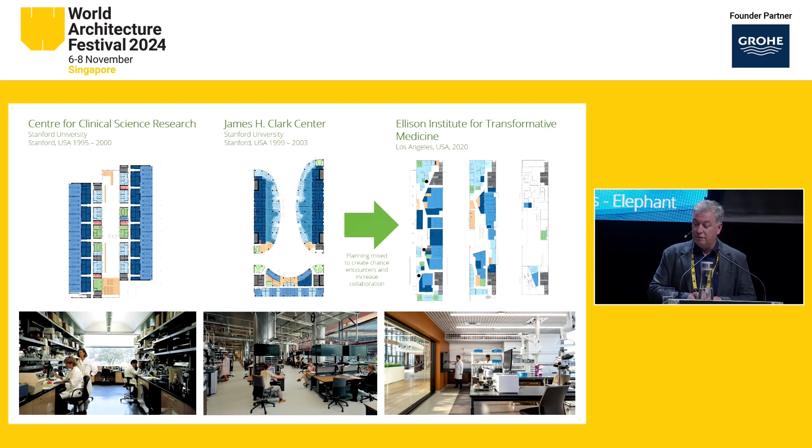When you open each one of those volumes, you can see that sequence. So it just gives you a sort of visual feel about how long the human genome is. Apparently the female genome is another 50 books, so make of that what you will—but quite an interesting stopping and inspirational point around the building.

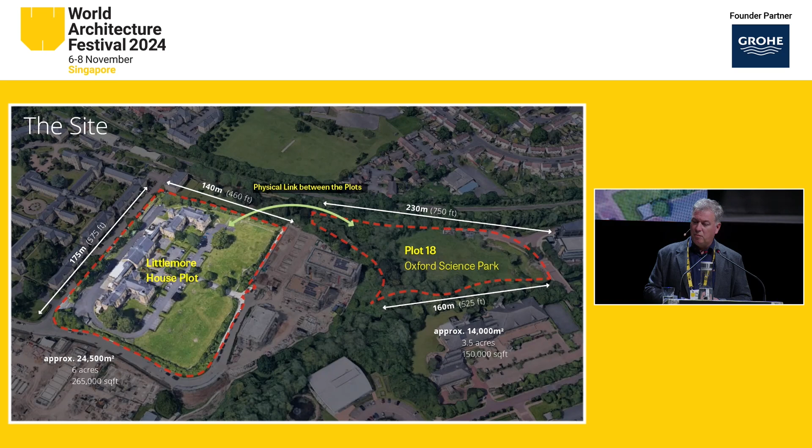So that site is very much more suburban, it's more hemmed in. Plot 18 on the science park is much more natural, and you can see the difference between the 2 sites—one surrounded on 3 sides by buildings. Those buildings are Peabody Trust affordable housing, so we have a number of setbacks we have to adhere to on that particular plot.

The Littlemore Brook plot was flattened when they created the science park, but it has a brook running down the left-hand side of the site, and that site actually floods—we had to take that into account when we designed the building. It's surrounded by nature as opposed to surrounded by buildings.

That led us to a very simple approach in creating the two buildings that make up the Institute. One was to effectively complete that inner courtyard with the Littlemore House buildings, and then the Littlemore Brook was really to make it look out into that green landscape around it.

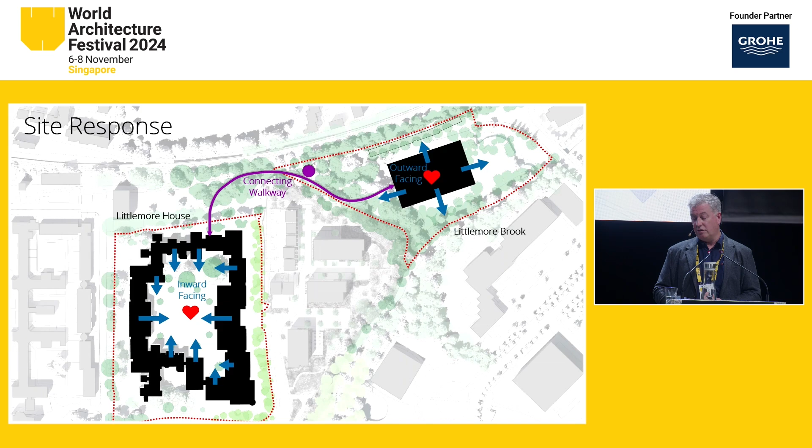One of the conundrums was connecting the two plots. They're not currently connected, so we came up with the idea of creating a walkway crossing a piece of land, which had a lot of constraints attached to it. On the Littlemore House site, there's a 6-metre drop across the site to the corner, and there's 100 car parking spaces which the client wanted to retain. So we pushed them into the corner and created a sort of flat deck.

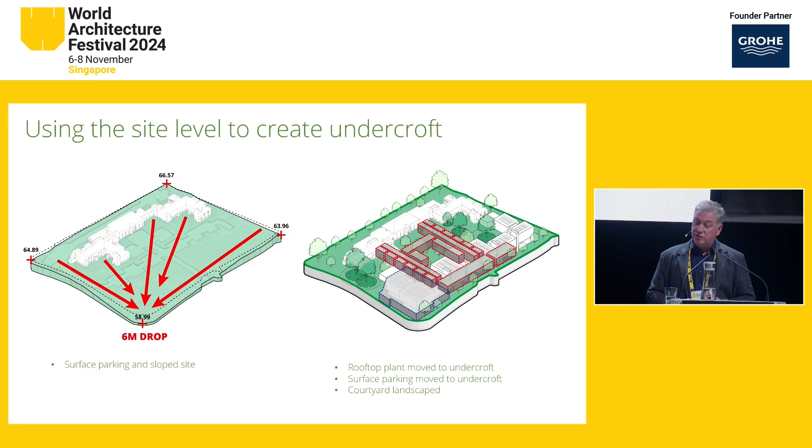The other thing we had to do was rooftop plant. Laboratory buildings can be quite cumbersome and heavy, and in creating that deck, we managed to put some of that plant underneath and liberate the roofs, which has allowed us to put a lot of PV collection.

We're using ground source heat pumps as well, with a lot of boreholes around the site. That's generating 550 megawatt hours of energy and provides roughly a third of the total site energy demand for us. Underneath those panels, we have a rainwater attenuation system, which helps us collect and attenuate any heavy rainfall.

Again with the brook, this particular site is susceptible to flooding, so a lot of the new regulations demand that you capture a lot of your water on site. Around the solar panels and on top of this system, we're using a green roof system which helps us enhance ecology in terms of planting with wildflowers and attracting insects and birds.

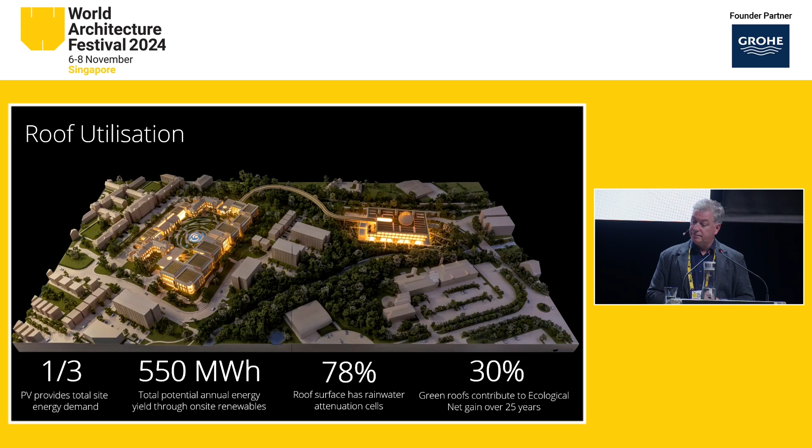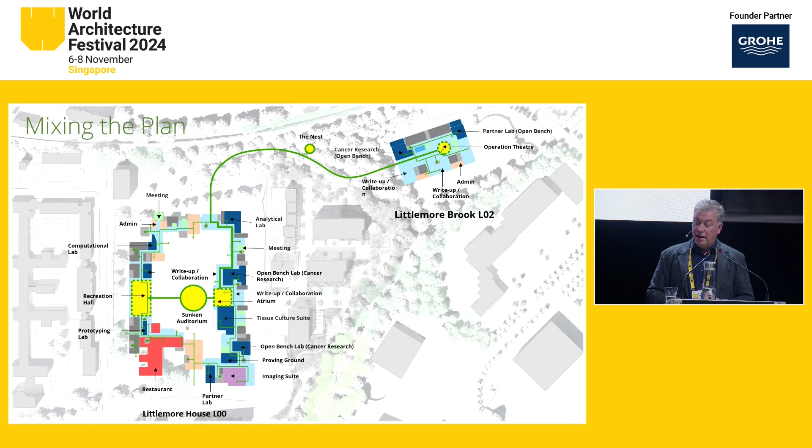So if we look at the plan, you can see a number of scattered laboratory clusters, and each of them has some of the research projects I showed you earlier attached into them. The purple area in the bottom right is the clinic, and underneath that clinic we have an MRI scanner, which will plug into helping the NHS with some of their screening, and we have CT scanners as well on the first floor.

As I mentioned, you can see from that plan how we create these smaller clusters. It's almost like an incubator, where these different fields of research can either use a wet lab or a dry lab and have a series of write-up spaces, offices, and lab support around them.

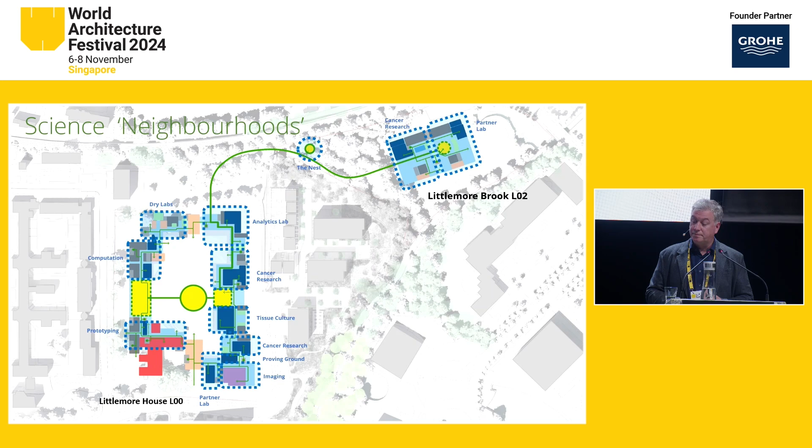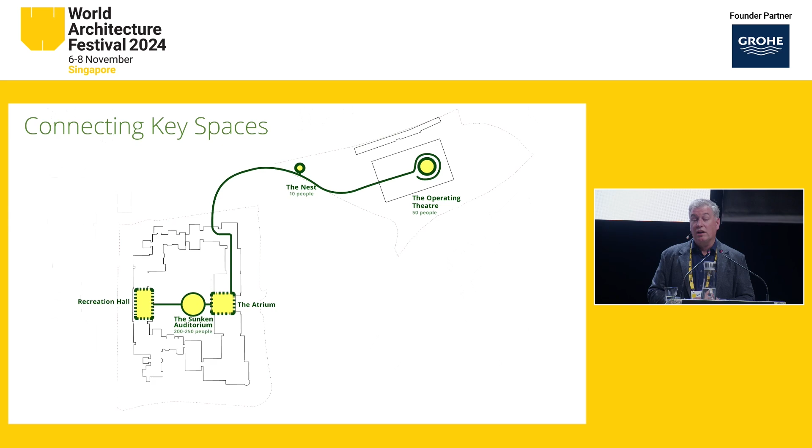Another thing that was quite interesting with the Institute was really creating that journey around the campus. There's a route formed around the quad, but we also wanted to connect a series of key spaces together. We have five key spaces that make up areas for more collaboration of different sizes of people within the campus.

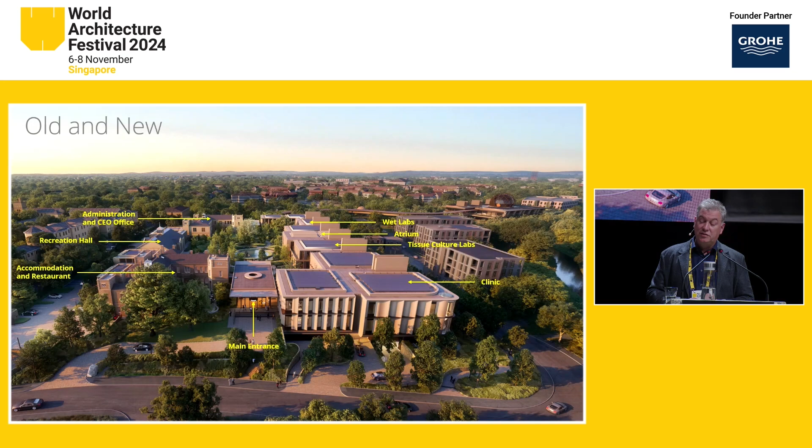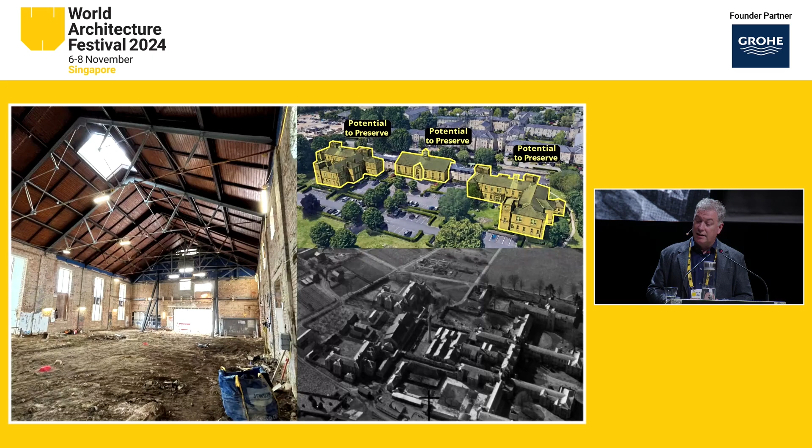Some of the buildings we inherited include that central building, which has amazing Victorian trusses that we're trying to retain while creating a new space there. The idea is that it's potentially a library. The doors on the left open up into the garden in the central courtyard, but this particular space is reconfigurable for a number of events.

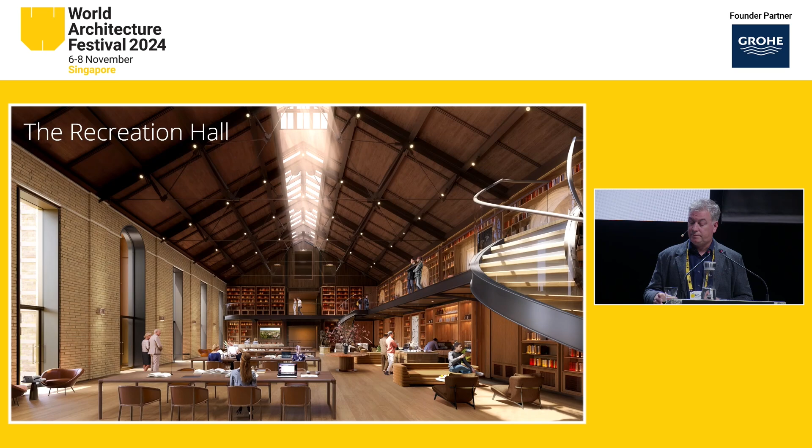The recreation hall, through that basement undercroft, also connects us through to the auditorium, which is a 250-seat auditorium, and then further into the atrium, which is the centerpiece of the larger new wing.

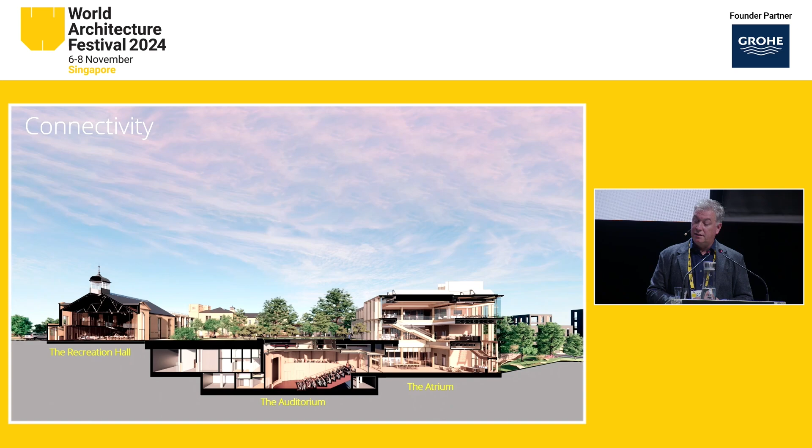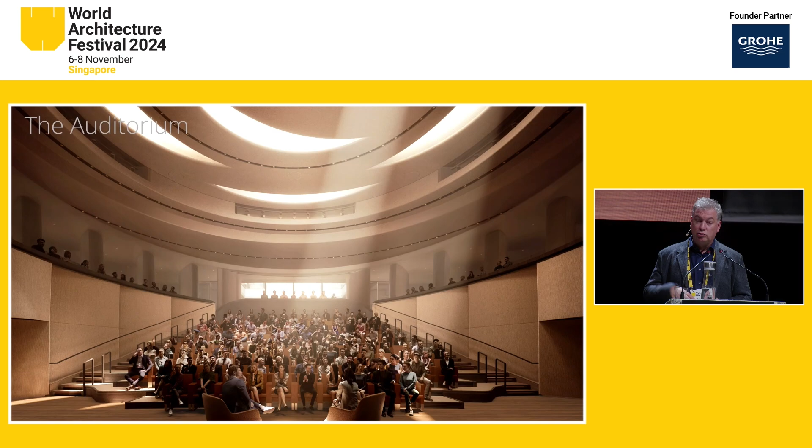So here we see the auditorium. As I said, when we were going through a briefing session with Sir John Bell, he said there's not a lot of 250-seat auditoriums actually in Oxford, particularly in South Oxford. So we slightly increased the size of what we were originally thinking to create this space, and you drop down from the basement level into this bowl.

The idea is it's flexible, so larger auditoriums tend not to get used all of the time. So we've made it so it can house 3 different modes. In collaboration mode, the bottom 6 tiers can be flattened into tables for a classroom arrangement, and the fins around that upper concourse can be opened and closed. We looked at the Barbican, which has a fantastic theatre where you enter through side doors, and that inspired us to create this flexible space which could be open, in symposium mode, so people could come and go and sit in the wings on that concourse and have separate discussions.

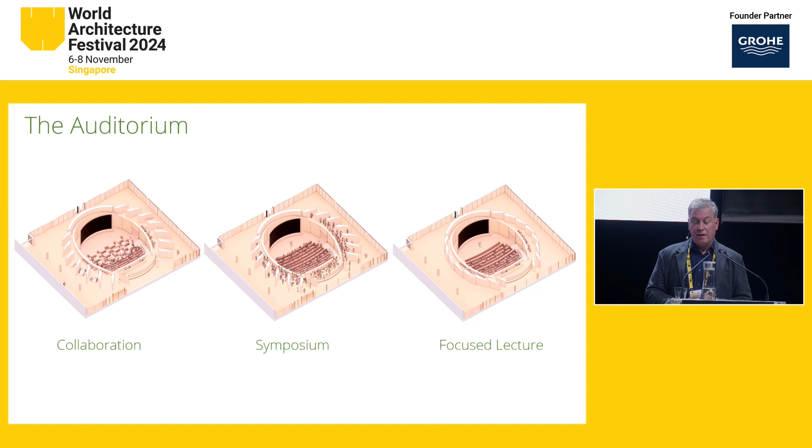The third mode would be you can close the whole thing down and have a focused lecture. As we pop up from that auditorium space, we come into the atrium, and another key thing about the Institute is having science on show.

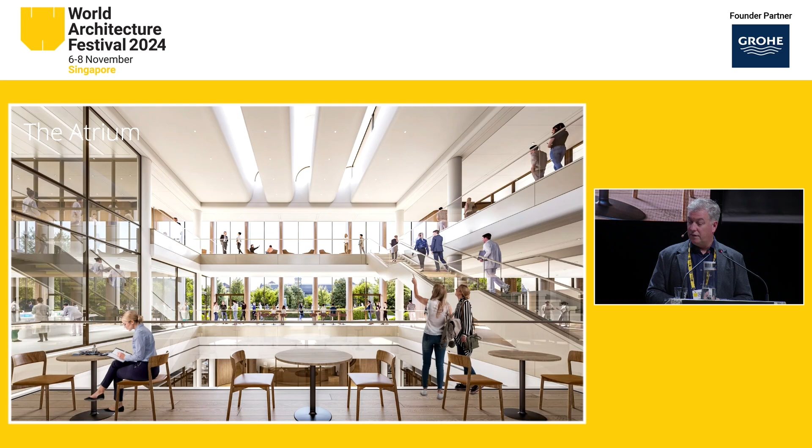Patients who are receiving infusions will be toured around this building, and that's partly very deliberate from Dr. Agus's point of view, that the scientists can see the patients, and the patients can see the scientists working on their ailments. We have this 2-story tissue culture lab there. Tissue culture is very important for testing cancer treatments, so that's really the heart of that space. We have lower vibration labs down in the basement for microscopy as well.

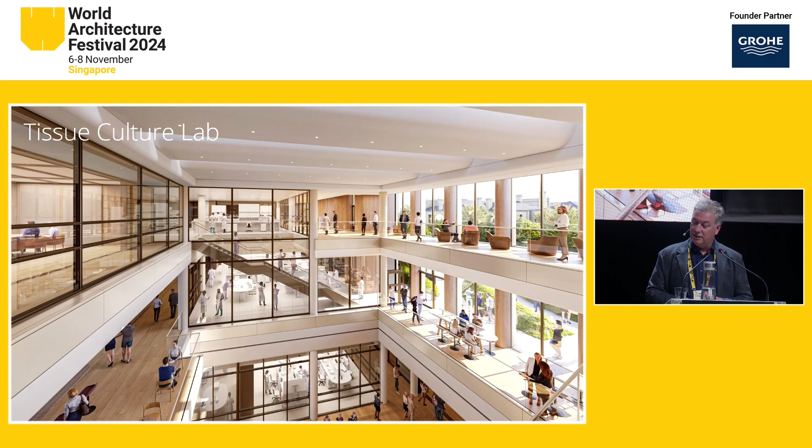The other thing we looked at doing—Lisa was very keen from some of the tours we saw. We went to see the Crick and some of our buildings, and scientists tend to build themselves in. They stockpile. We went just after lockdown, and they were stockpiling lots and lots of materials, which in turn led to quite cluttered labs. But there was no eye contact, no eye-level engagement within the lab.

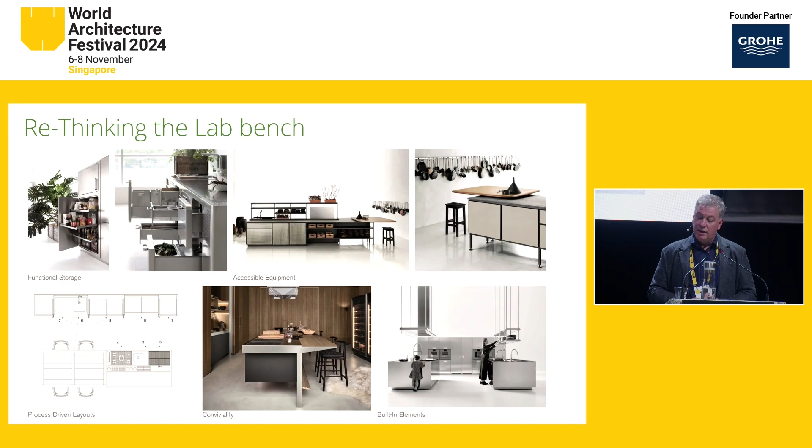So we started talking about could we make a lab bench a little bit more like a kitchen island, so people could have conversations there when not doing focus work—there needs to be focus work as well, but there's also discussion that needs to happen. So we took some of those ideas and developed a new design for a laboratory bench. We've got that into a prototyping stage now, and we're testing it out in some of the Institute's temporary buildings, and what's really interesting is, weirdly, a very simple device.

The D shape at the end of it really does attract people to have little huddle meetings along it, which is a surprisingly simple way to create interaction. You can also see we've cleared a lot of the racking above, so that goes into the perimeter of the labs, with roller boys underneath the labs, so they can almost wheel in what they need rather than surrounding themselves with it all of the time. That's a view of what it will look like.

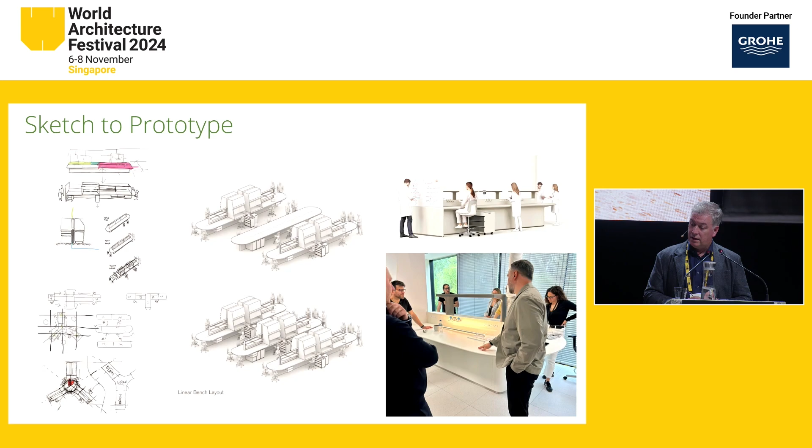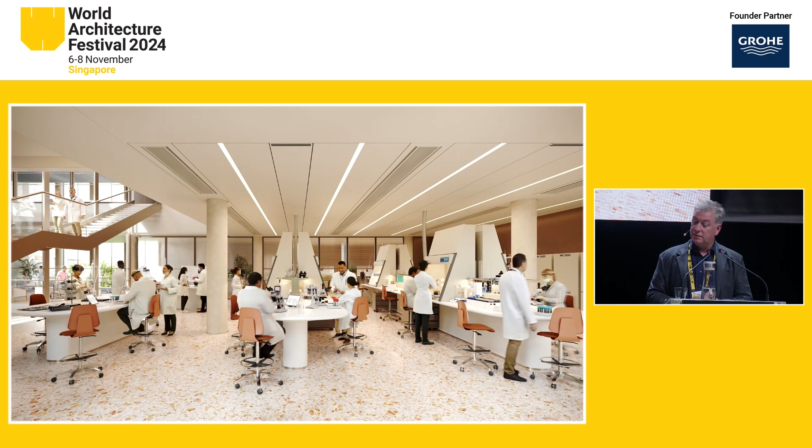So we have umbilicals that drop all of the services out of the ceiling onto these benches, and then you can put fume hoods and whatever they need to do the tissue culture within that space. Similarly, we developed a range of furniture—sit-stand desking for the main open floor plates for the dry lab computational side of things, and write-up spaces for the scientists.

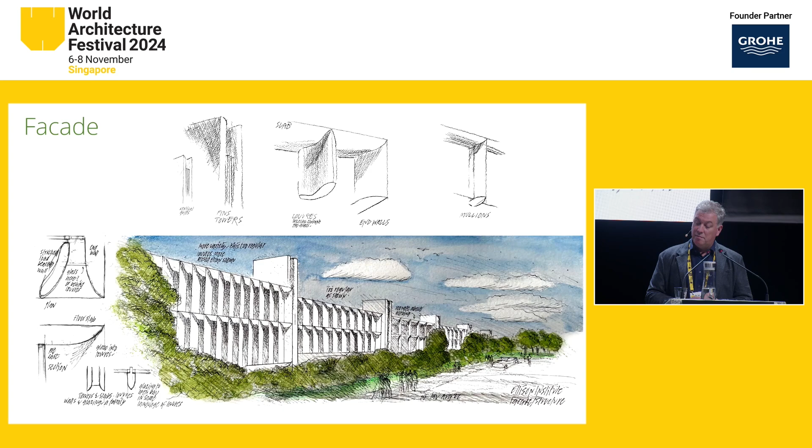Just jumping outside the building, on that new wing we created, the elevation is over 100 meters long, and these are some sketches that Norman sent us about how we could potentially break up that elevation. We have a lot of different setbacks from the surrounding buildings, and a height limit, so that allowed us to start thinking about how this facade could respond to that.

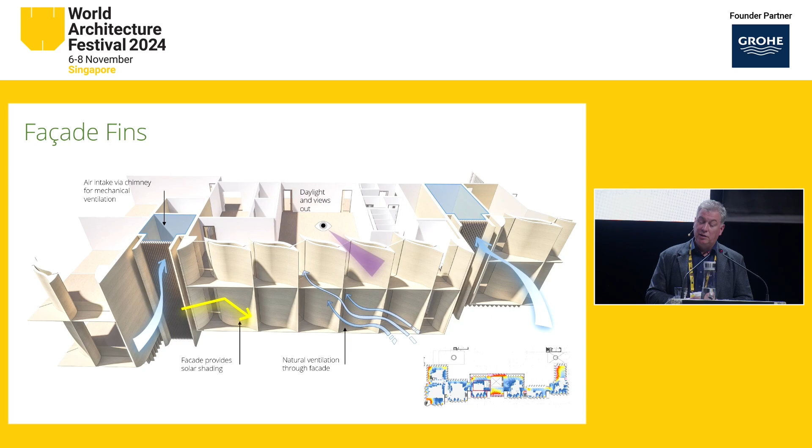This was kind of the outcome of those sketches—moderating daylight coming in, allowing views out, allowing non-laboratory conditions. We have a top and bottom opening window which allows ventilation through and into that space. You can see the sort of chimneys as well, breaking up that facade.

These bring a lot of air into the basement plant and also allow exhaust out from some of the laboratories. The exhaust has to be higher than the roof level, so we decided to create features out of these. One of the conversations we're having is about these sort of Venetian chimneys being slightly over-exaggerated, but they help make an identity and break the facade down.

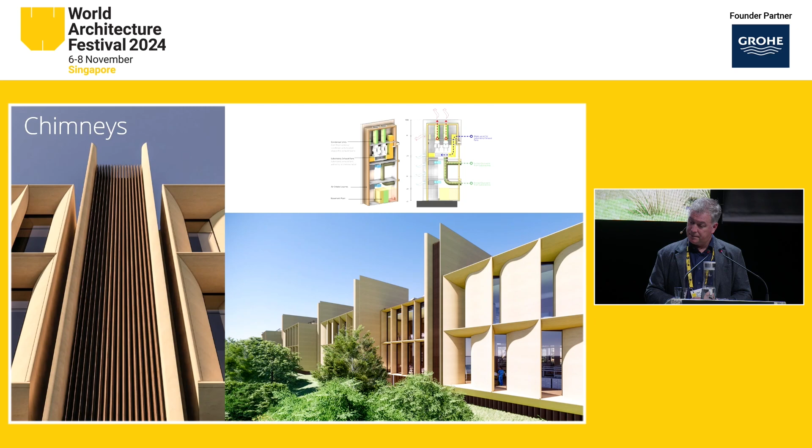Again, internally in the courtyard, the facade responds. This is either side of that central atrium—they have an upper balcony space, and we have a TPO chestnut tree in one corner. This is where you enter from that walkway that connects the other building, so it's responding to that access point.

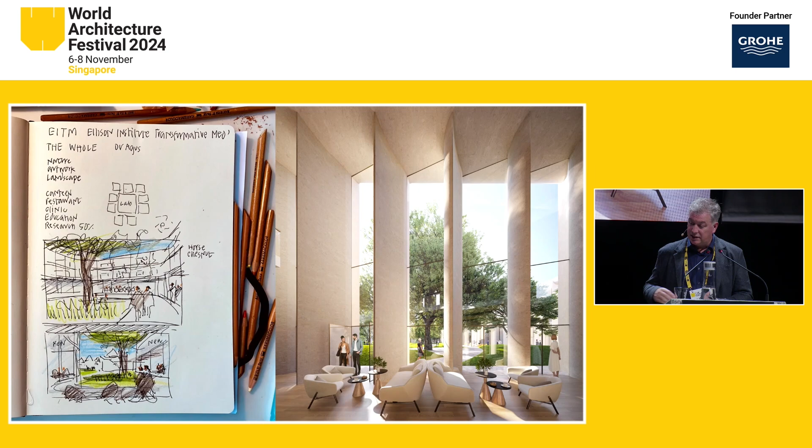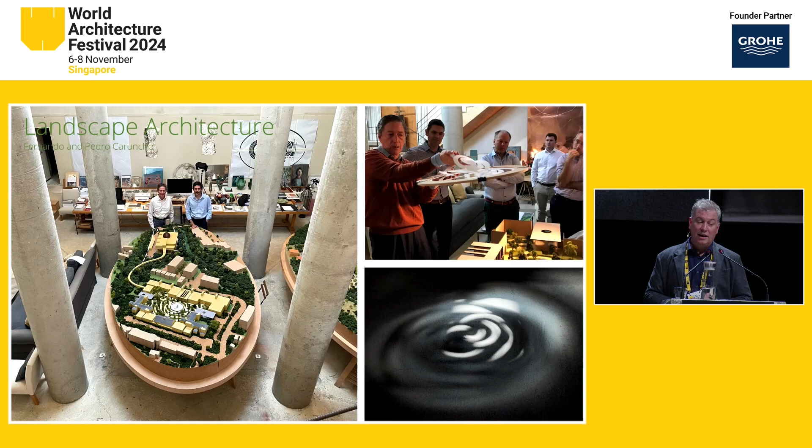We enlisted Fernando and Pedro Caruncho, two amazing Spanish landscape architects, to do the landscaping concepts for the building. Originally we were thinking of that central quad as almost just a cruciform with a square, and we actually had a square auditorium. Through dialogue with Fernando, he came up with the idea of using a rose petal as a geometry, and it really transformed how you move around that garden.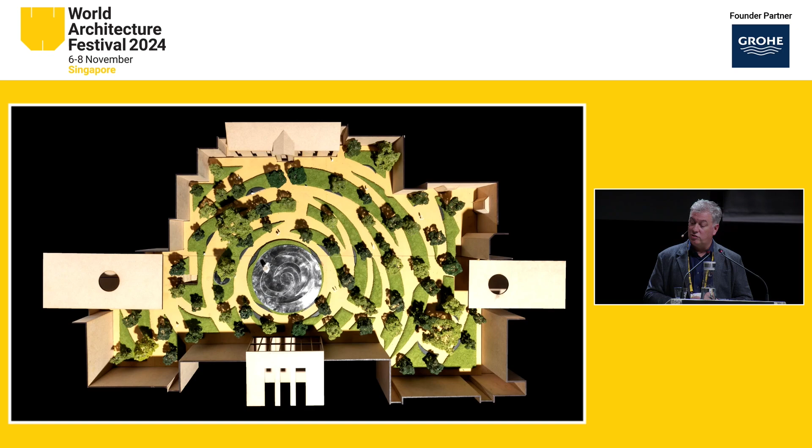You can come out of a number of places on the facade, particularly these four modules you can see here, but as you move around that garden, you move around the water feature which sits on top of the auditorium. We're hoping it really creates this amazing sense of moving in between landscape.

That's probably the third thing Larry's super keen on: landscape, perhaps almost as keen as the architecture itself. He uses it himself as a counterpoint for doing his work, to sit in nature, and it helps him focus and concentrate.

So he's very keen on developing this, and we're now prototyping it, bringing species in from around Europe. We have a nursery in Cambridge where we're assembling this. They were all just going to sit in a field in the nursery as they acclimatized, but we've managed to convince the client to allow us to set out the garden one-to-one with gravel paths, and that's really going to help the composition and some of the species selection.

The species selection partly comes from the history of the mental health hospital. Our site had a productive garden with cherry trees, pear trees and apples, and we've partly used that for the palette, along with some more ornamental trees, particularly magnolias, and one single ginkgo tree, which we've put in the corner.

It's a smaller courtyard off the main courtyard, and the clinic surrounds it. The interesting thing about ginkgo trees is they're a symbol of resilience in Japanese culture, very old prehistoric trees, and they turn a beautiful yellow color in the autumn. So this single ginkgo has its corner there in the clinic.

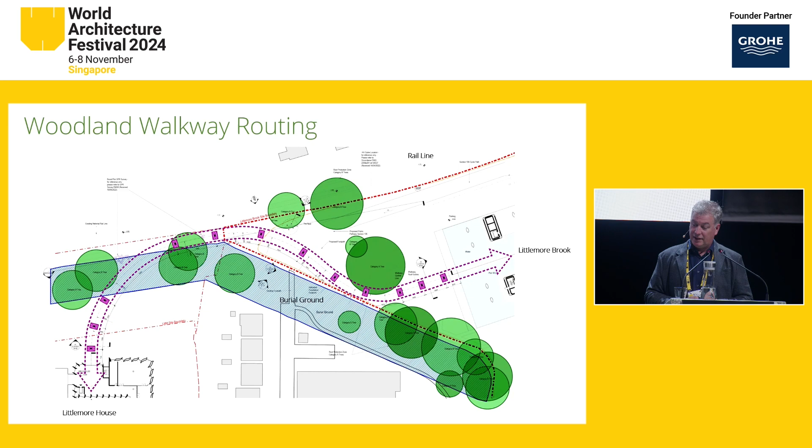There are also a number of protected trees that we have to move around, so that line really does thread a needle, particularly at the top of the site. The agreement we have is with the people whose land we're crossing—the only point we can cross is where it meets our plot 18 at the very top there. So it's been quite a geometry to finalise.

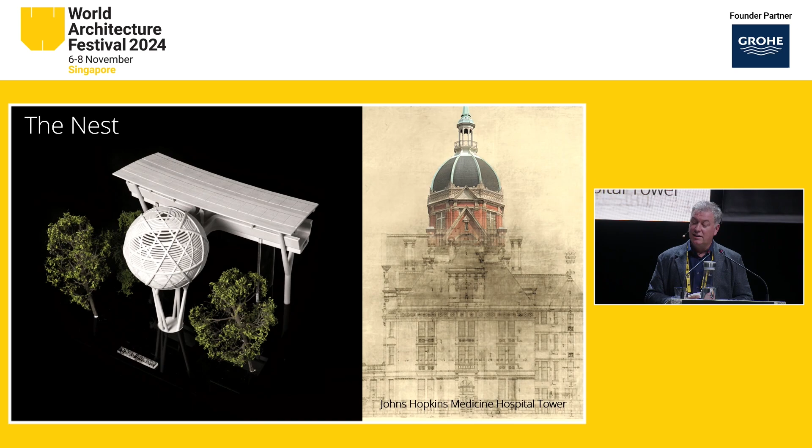Another thing Dr. Agus brought us in the design process was the idea of perhaps meeting somewhere midway along that walkway—this kind of small analog space. He told us a story about the Johns Hopkins Medicine Tower over in the States, where apparently students used to hide out up in this tower and discuss their work. He thought it'd be a great idea to somehow recreate that in the design of what we call the nest, which sits in and amongst the trees off that walkway.

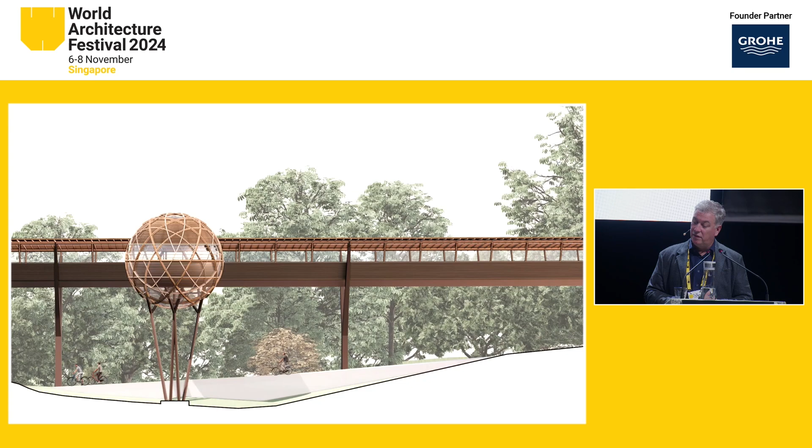This is like a mini version of another space we've designed on the campus. You approach it along this walkway, and it's an analog space. Looking around some university buildings at Oxford, the Beecroft Physics Building was interesting because they had small breakout areas with just blackboards, where people could discuss ideas in a relatively confined environment. So we brought that into the thinking.

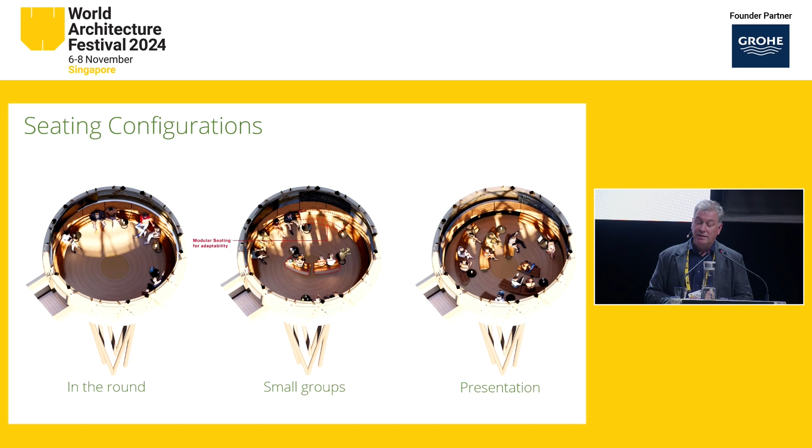That's reconfigurable as well. You can pull the seats off the side of the dome and configure it to whatever requirement you need. But it's only designed for around 10 or 15 people.

As you come from the skywalk, you come into the top level on the left-hand side there, entering at level 2, elevated into the building. If you come from what will be the new station or from the rest of the science park, you come up underneath the building from the right-hand side.

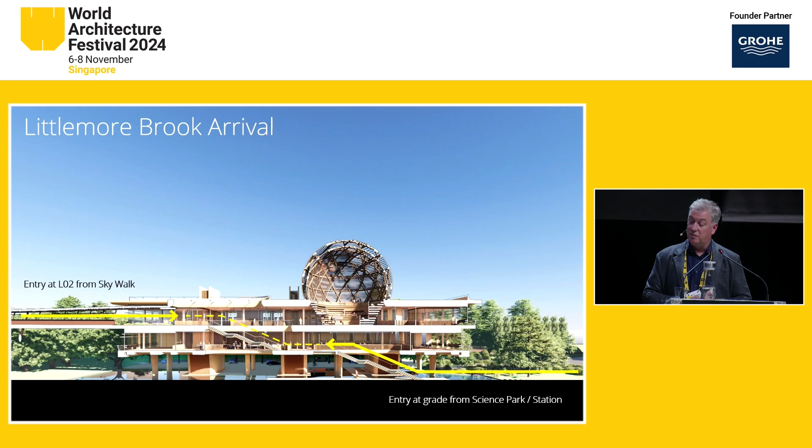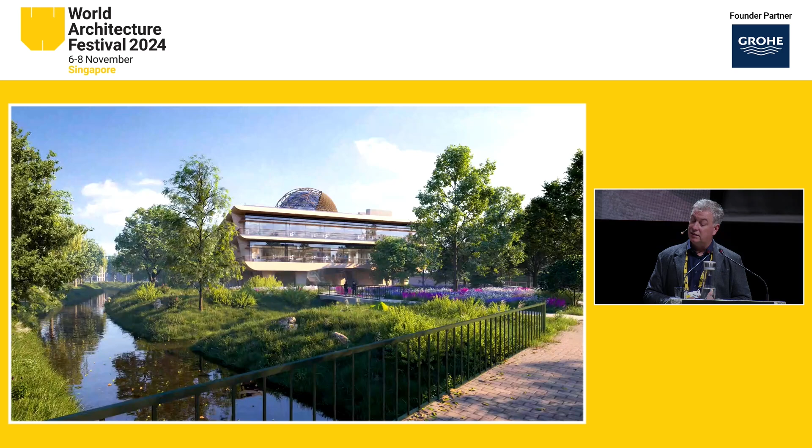As I mentioned, the brook creates a particular approach to the architecture. Buildings close to this brook have to lift themselves out of the floodplain and not displace water onto other sites. That led us to putting the building on stilts, so that when it floods, water can flow underneath. We use the water feature to bounce light under, and there's a veranda that also has an aspect onto the brook.

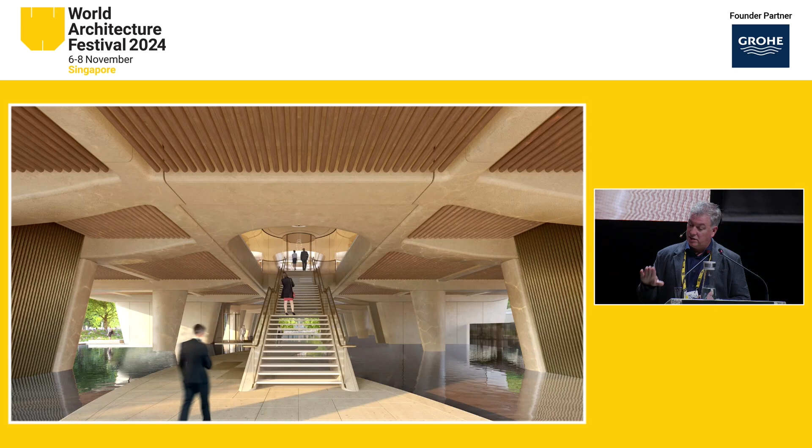As you approach from the station, this would be the view. You come up under the belly of the building and into the reception, this central space here.

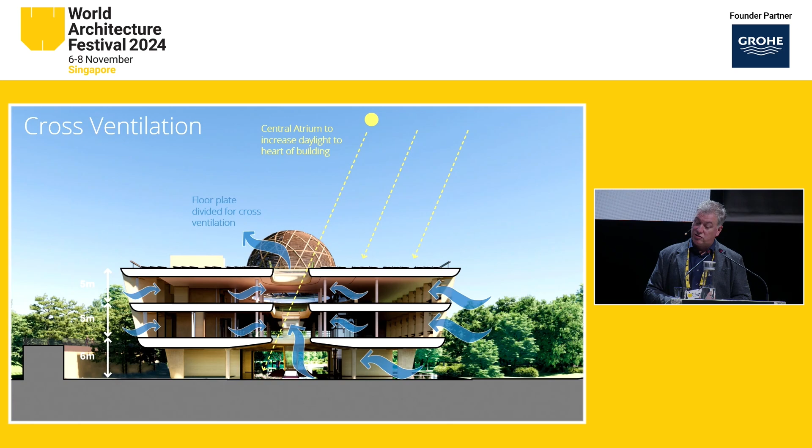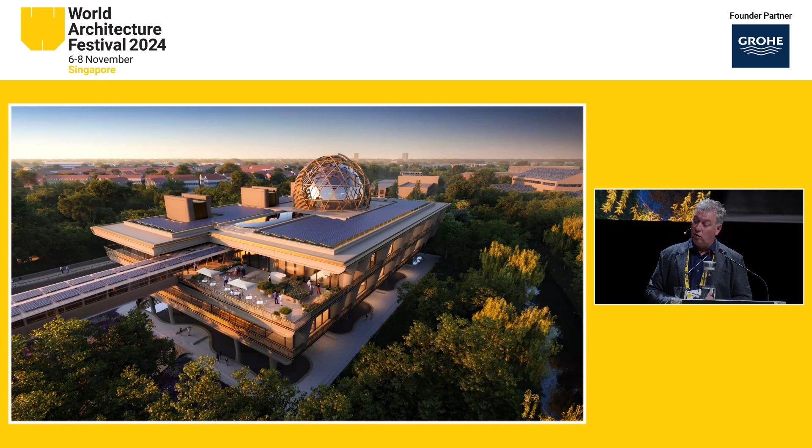The building's fairly simple compared to Littlemore House. It's a rectangle with a central atrium. Again, we can cross-ventilate it and bring air up through the building. There's also a small terrace, a little satellite cafe for people working in this building as you come off that walkway at level 2. And that's another view of what that looks like.

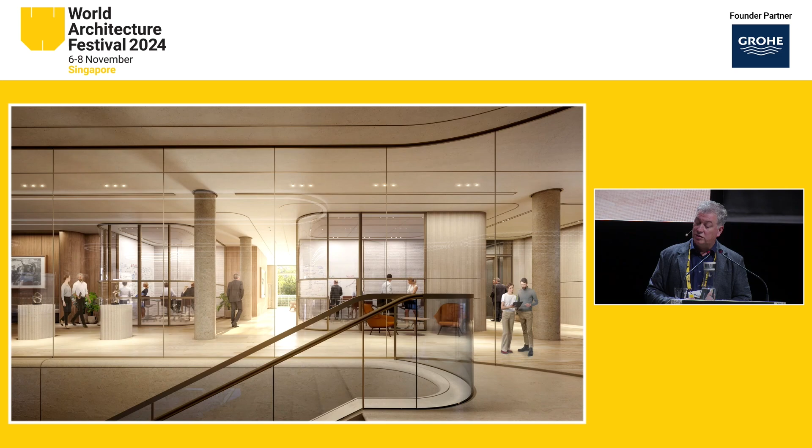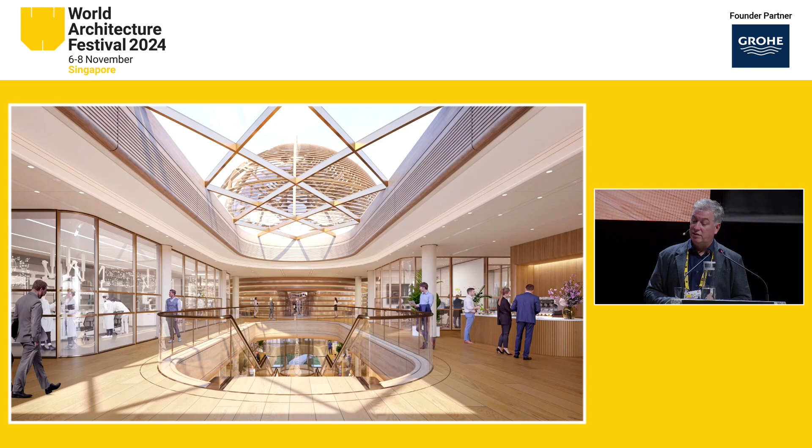As you enter, the architecture and interiors echo what's happening within the Littlemore House plot. Similarly, as you come in on that central axis, you can see a robotics lab. The Ellison Institute has a number of partners developing interesting things, and they want to show that off in the partner lab on the left-hand side. So at the main entrances to the institute there are showcase laboratories, and in the distance behind there you can see another smaller auditorium.

This came from discussing a lot of the Ellison scholars. They run a program for students, recruiting students from around the world who will jointly work with Oxford University and the Institute. We started talking about how interesting the old anatomical theatres were. Dr. Agus picked out this Agnew Clinic painting, and then we looked at some of the very early anatomical theatres, including the one from Padua on the right-hand side, with very steep-sided walls and a very close environment.

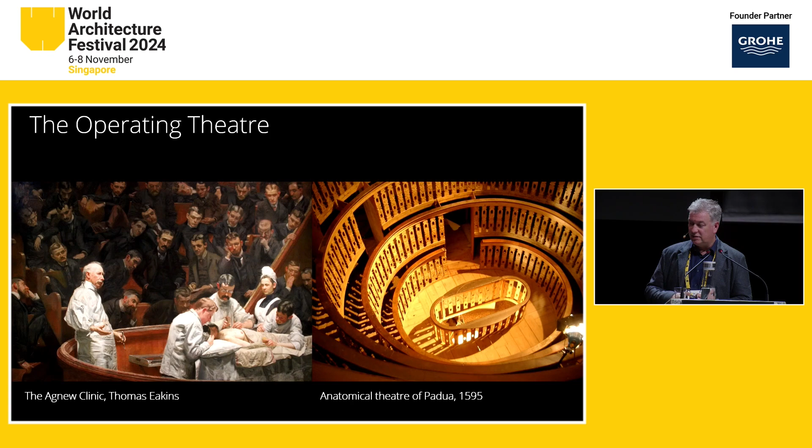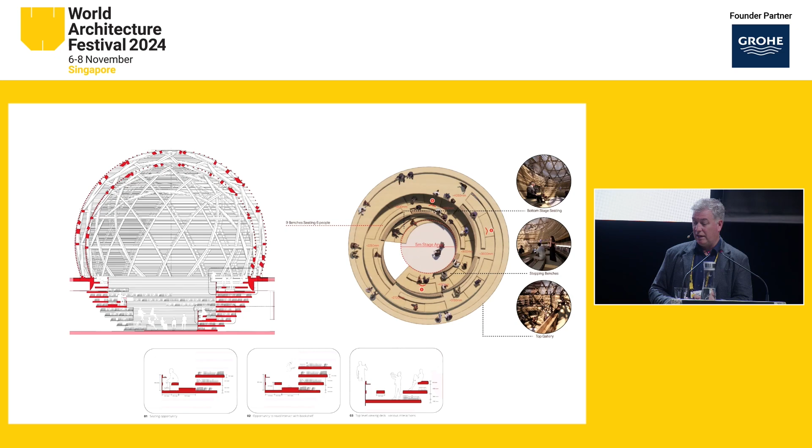We wanted to distill that into a new version, so we created this spiral step ramp underneath the dome. The dome becomes the beacon of Littlemore Brook. It can house about 15 people at the bottom, but it can expand—people can occupy the spiral. There are small seats around the edge to look into the theatre, and it can hold up to about 85 people at full capacity. This is a model that we built.

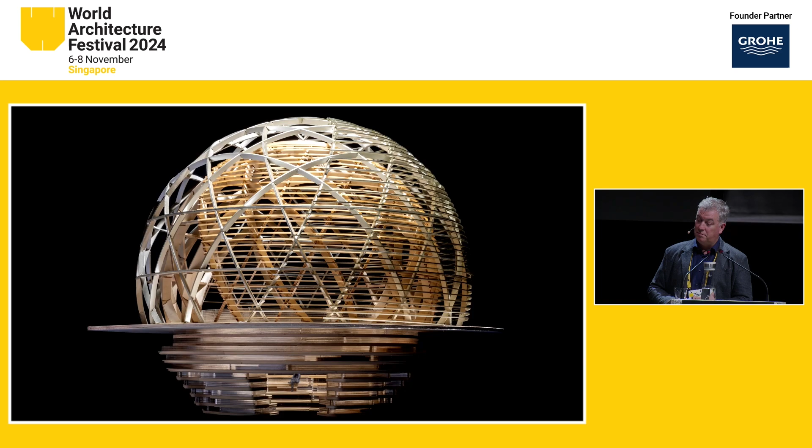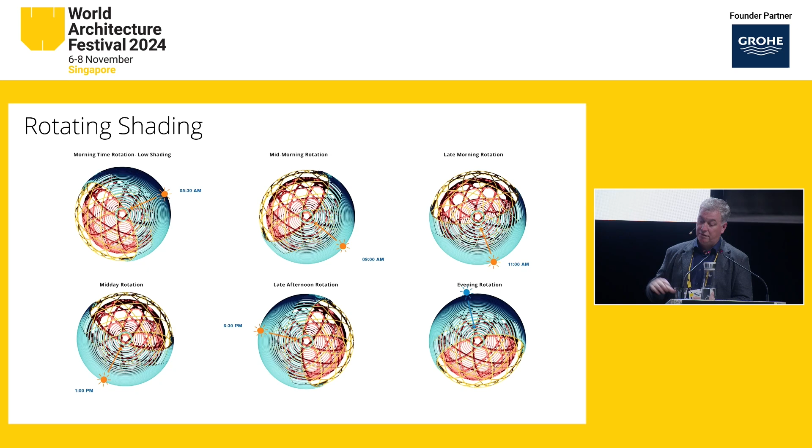The inner frame is glulam timber, which we're having made by a company called Blumer Lehmann in Germany—they do amazing things with wood. The outer dome is actually a revolving shading structure that moderates the glare and heat gain to that space. We did the usual analysis to understand how it works, how big the louvers need to be, and what orientation. The blue shading rotates around the inner dome, and we can send it all the way around—the northern piece of the dome is clear, so we can bring that around to create more shade if there's a glare problem within the space.

John, thank you very much for that. This is a very complete project, even though it hasn't started yet, because it's everything from soup to nuts, isn't it? It's landscape, it's buildings, it's retrofit. And then I suppose in terms of the purely new, the redesign of these lab benches and that whole proposition is an exercise all of its own.

And I suppose this fits into a long line of Foster buildings which have examined everything from climate to working practice. Any particular challenges on this one, or precedents you could draw from previous Foster work?

Well, you can see there's, I don't know if this mic's working. My mic working? Better to use that one. No, is that working? Yeah, I can hear it.